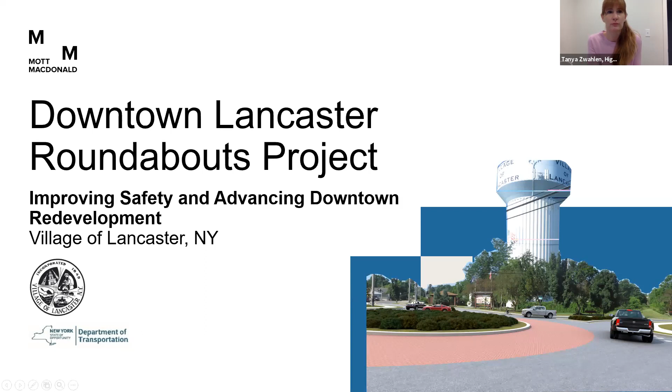I just want to go over a little bit of instructions on how this meeting will work. Jeff, can you advance the next slide? So probably a lot of you have not attended a public meeting using Zoom or Facebook Live, but probably some of you have used Zoom in the past few months as we've been in quarantine and social distancing. So for the purposes of this meeting, we're going to give a brief presentation. It'll be about 20 or 25 minutes, and then we're going to move to a Q&A period.

So while we're giving the presentation, I would ask everybody to mute your microphone so that we can reduce background noise during the presentation. For those of you in Zoom, you have an ability to raise your hand. And if you'd like to audibly speak during the Q&A period, you can raise your hand. And when we get to that portion of the meeting, I'll call on you. And then you can unmute your audio and ask your question.

For those of you on the phone, although let's see, yes, we do have some people on the phone. So for those of you on the phone, you're automatically muted. And if you want to unmute yourself, you can use *6. And if you want to raise your hand to speak, you can use *9. So *6 to mute and unmute, *9 to raise your hand.

For those of you who are using Zoom, you can use the Q&A feature at the bottom of your screen on the Zoom controls to submit questions in writing during the webinar, and we will be monitoring those and responding to those during the Q&A period. So that's if you don't want to speak, but you still want to submit a question. There's also a chat. You can send a question to us through that.

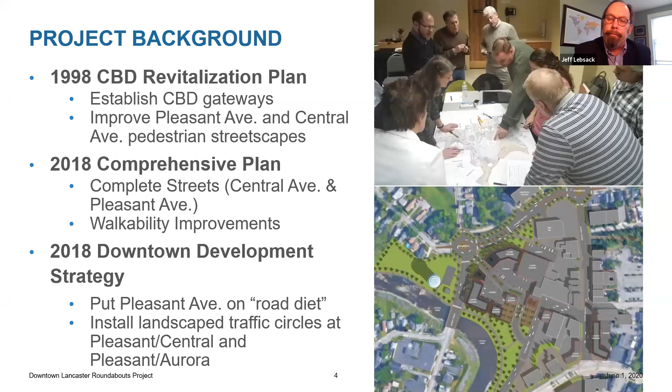And then in 2019, the village applied for and was approved for a CMAQ grant, which stands for Congestion Mitigation and Air Quality Improvement. And I just want to quickly touch on a few of the key requirements of that grant and how that affects the project. The grant is only for transportation projects that improve air quality and provide congestion relief. So that's one of the requirements of what the project has to achieve.

The amount that the village received from DOT is just a little bit over $3 million. That's 80% of what the project is expected to cost. For intersection improvements, the NYSDOT recommendations are that the primary objectives are to minimize conflict and provide acceptable capacity. So that basically means to do everything we can to make it a safer intersection and a more efficient intersection.

And then finally, roundabouts are what the state DOT prefers when they are either feasible or cost effective. And we can talk about that a little bit more as we go on. But that's the requirements of the grant that is funding this project.

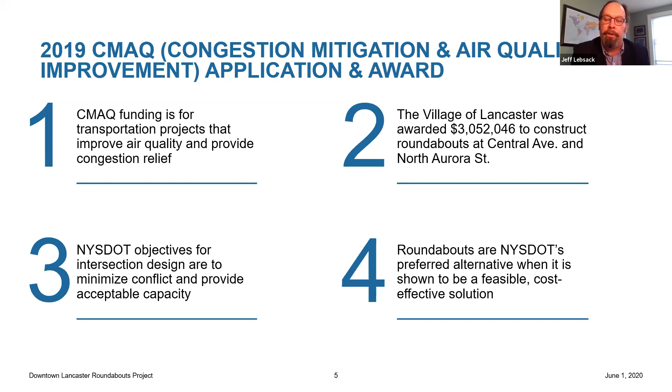So when the village looked at what they wanted to do on these streets and intersections, pretty basic objectives that anybody would want to do for their community, and that's to improve your air quality, to make it safer, to have more people out enjoying walking and bicycling and taking advantage of those travel modes that are healthy, and also to improve mobility for all users. So that means people who might have some restrictions to how they can move. So we want to make sure that there's access provided and that there's transit options.

And of course, what really helps is that if there's some private investment that goes along with the development, that additional tax revenue can really stimulate your economy. And finally, we want to promote sustainability. And so specifically things like reducing stormwater runoff into the surface water bodies, or reducing the amount of energy that's used as part of the project.

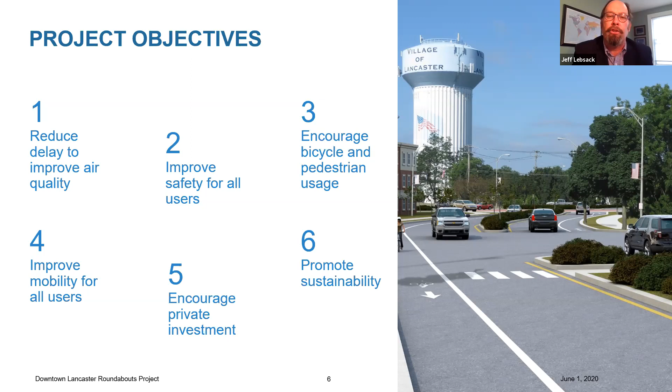So I mentioned the commitment to public engagement. And this is a quick listing of the things that have occurred since the project started at the end of 2019. Highland Planning conducted interviews with a few key stakeholders to learn about the village concerns and ideas about this project. That led to a public engagement plan that was approved by the village board. We met with the adjacent property owners in January. We went door to door to all the business owners on Central Avenue and West Main Street in late January.

We put information on the village website. We conducted a public meeting at the Lancaster Opera House at the beginning of February this year. We also were present at the Lancaster Family Fun Night, and hopefully found some more people who weren't able to attend that first public meeting. We did a mailing this last week to over 5,000 households in the village. We met again with the stakeholders in the corridor, and we're going to provide a survey to everybody for the next 30 days. So there's been a real attempt to inform people and to get their input on this project.

Now, as part of that, we've learned a lot of things. And as you might expect, there are very mixed opinions about roundabouts. And hopefully from this meeting tonight, I can address some of your questions and provide some information that will help you understand roundabouts better. There's also questions about, is this project needed? Is there a problem with the amount of traffic? How much is it going to cost the village, and how will that cost be paid?

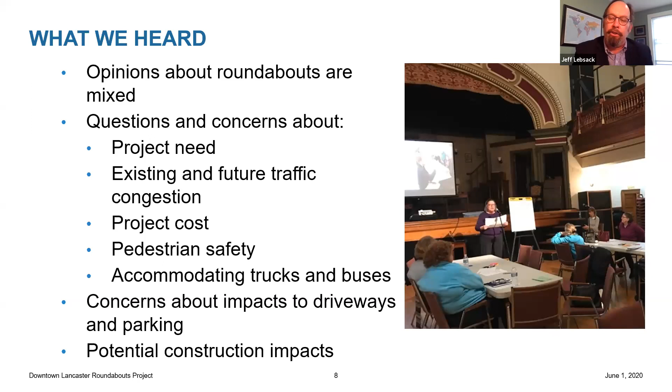So, as I mentioned earlier, the federal aid process requires a variety of steps that have to be gone through. So we started out with the public outreach to hear from the community about their ideas, concerns, issues. We also conducted a pretty extensive range of environmental studies that have to be done as part of the federal aid process, and those include things like examining the effect of the project on surface waters, effect on endangered species, effect on cultural and historic resources, and if there's any environmental contamination in the site.

So all those things were done in early 2020, and the good news is there really aren't any major environmental obstacles. There are a few things that we have to be aware of, and we can talk about those later. We then developed some alternatives to consider for the project, and we analyzed those alternatives. After we analyzed the alternatives, we prepared preliminary plans for the feasible alternative. We developed the cost estimates for that alternative, and there's a draft design report which will be on the website next week for people to look through.

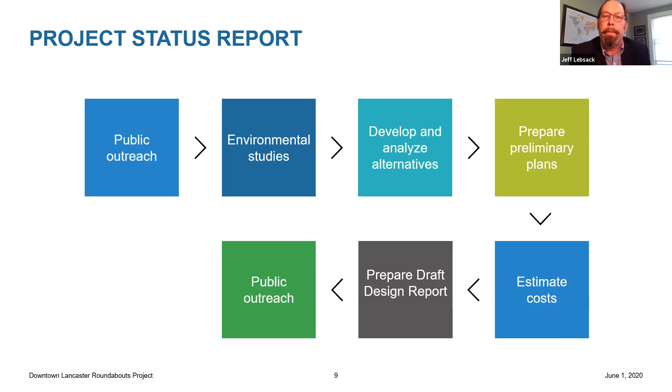And then here we are tonight with some more public outreach, and the public outreach we get tonight will also be fed back into the design report and the preliminary plans. And so there's sort of an iterative process here that we go through to do as much as we can to address the community's ideas. So I talked about the analysis of the alternatives. One of the questions that people have asked is about the traffic on the streets and at the intersections.

This is just some basic data that shows that north of Pleasant, about 15,000 cars a day on Central Avenue, which is about close to the limit for a street that has 2 travel lanes. And about 4% of that traffic is trucks. Pleasant Avenue between Central and North Aurora is about 7,000 vehicles a day. And North Aurora Street south of Pleasant is a little over 8,000. And as you all know, there's quite a trend of the traffic using North Aurora Street to Pleasant to Central and vice versa. So there's a lot of traffic that flows in that movement.

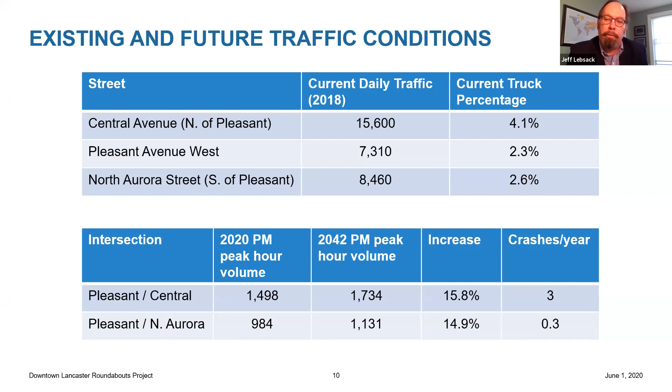At the intersections themselves, Pleasant and Central during the afternoon peak hour has about 1,500 vehicles using the intersection. That'll go up to a little over 1,700 in the future. So just a little bit less than 1% a year over the next 22 years. And there were 3 crashes per year; it's actually 9 crashes over 3 years because we have to analyze the most recent 3-year period. Pleasant and North Aurora obviously doesn't have as much traffic, so the increase will be slightly less, and the crashes there have actually been very low, so that's good news for everybody.

We had 4 alternatives that we analyzed with this traffic data, and those alternatives are the no build, which as you can understand is to do nothing. We also looked at just improving the signal timing at the intersections, which was a suggestion from the February 6th meeting. We also looked at improving the signal timing, but also trying to do the road diet and making the roads a little bit smaller and the intersections a little bit smaller to make them safer for pedestrians and slow vehicles down. And then we did the roundabouts at the two intersections.

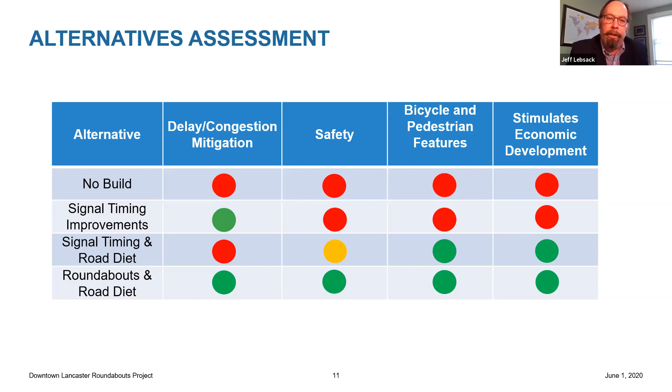And we evaluated the results of that analysis against their benefits for delay and congestion, safety, bicycle and pedestrian features, and their ability to stimulate economic development. These were those objectives we talked about earlier. So the signal timing definitely improves delay and congestion, but really doesn't do much else in terms of safety or bicycle or economic development. The road diet is almost the exact opposite, because it would improve bicycle and pedestrian and economic development, a little bit of safety by narrower roadways, but it did not improve the intersection delay or congestion. And the roundabouts did improve all four of the objectives.

So with that, we developed the concept that you're seeing on your computer screen now. This is the two roundabouts, and I also want to point out that the roundabout at West Main Street is shown on here. That is a separate project. It will be under construction shortly. We have been in complete coordination with that design team to make sure that these two roundabouts work together well. So all of the analysis that was done in that previous discussion did account for the West Main Street extension and the mini roundabout on North Aurora.

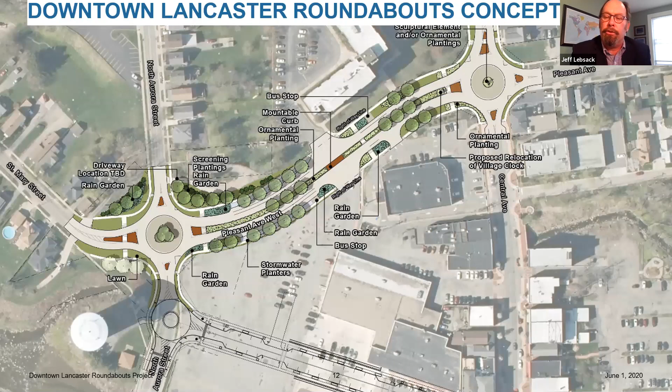So I want to just zoom in on a couple of the areas of this concept plan right now and go through some of the things that we can talk about during the questions and answers. So at the roundabout at Central Avenue, the current location shown in this drawing does have some impacts on property owners and the local businesses. So we have talked to them. We are looking at ways to reduce that impact, to address their concerns about parking and how their customers can get to their properties.

There is a clock in the median on Pleasant Avenue. Where it goes is up in the air. So if there's somebody who's got a great idea for that clock, we'd love to hear it. If you have an idea for what would go in the center of the roundabout, that's also something that's important.

And I also want to point out that this design is coordinated with the Central Avenue bicycle lanes project that will be implemented this season. And that is to put 5-foot bicycle lanes on each side of Central Avenue all the way to Walden, and it would eliminate parking on the east side of Central Avenue.

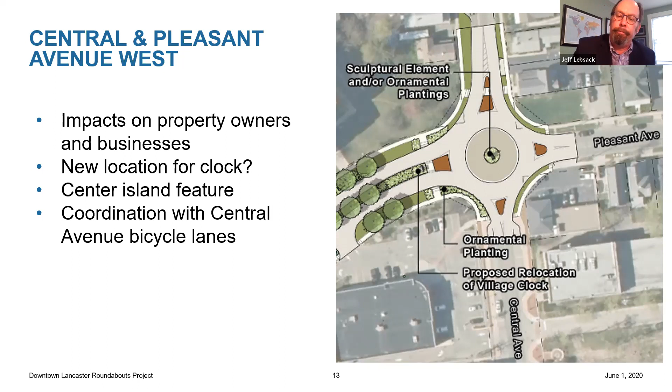At the North Aurora roundabout, we are impacting one driveway, and we're meeting with that property owner this week to talk about ideas on how to adjust their driveway. I did mention that we've coordinated with the West Main Street mini roundabout, and we have a nice dividing line between the two projects, so there won't be any tearing up newly constructed roadway. So they'll build their portion, and then this portion, assuming it's built this way, would mesh right in with that.

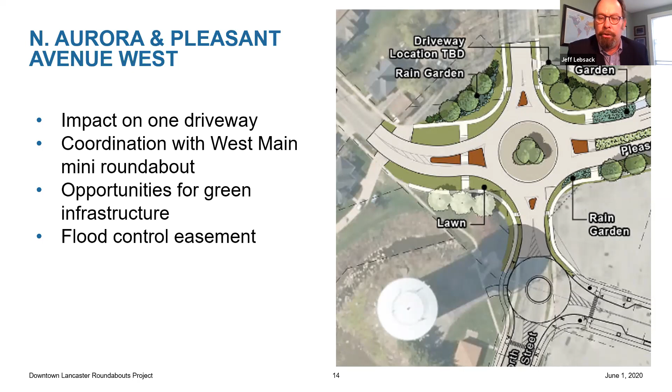This particular location also gives us a lot of opportunities for what we call green infrastructure, which is a method for doing a natural stormwater treatment. And there is a flood control easement here as part of the Cayuga Creek flood improvements that were done many years ago. And it's not a major obstacle, but we do have to go through a permit process with the Department of Environmental Conservation and the Corps of Engineers. So that's one of those environmental things that I mentioned that we do have to take care of.

Between the two roundabouts, this is the road diet on Pleasant Avenue West. The concept shown has 11-foot travel lanes, 1 in each direction, 6-foot bike lanes, some parking. Two things I want to point out are the mid-block crosswalk that would accommodate pedestrians from Lancaster Towers and give them a safe crossing of the roadway to get to the stores on the other side of the street. They would cross one lane of traffic. There'd be a pedestrian refuge. We could also add some special signs there if that is needed, but this is specifically oriented towards the population there at the towers.

We're also intending to restrict left turns in and out of those two driveways. So either one of them would be right in, right out, but if you do want to go the other direction, you make your right turn, you go down to the roundabout, you go around it, and you come back the other way. So it's really not a major inconvenience, and it would make the intersection much safer. And we also note that we're going to improve the bus stops on either side of the street there for the people who use the bus.

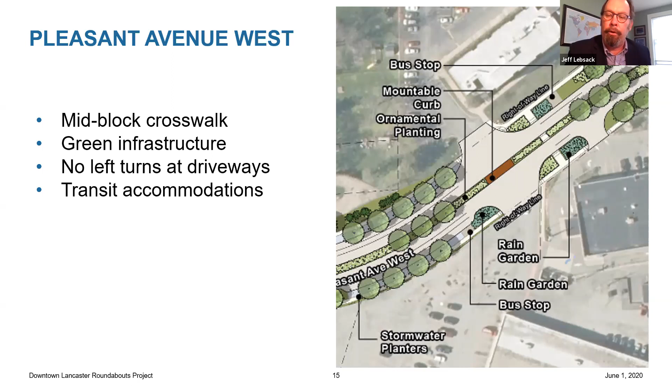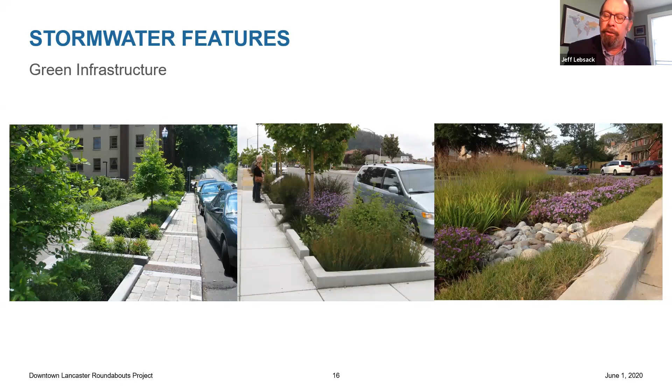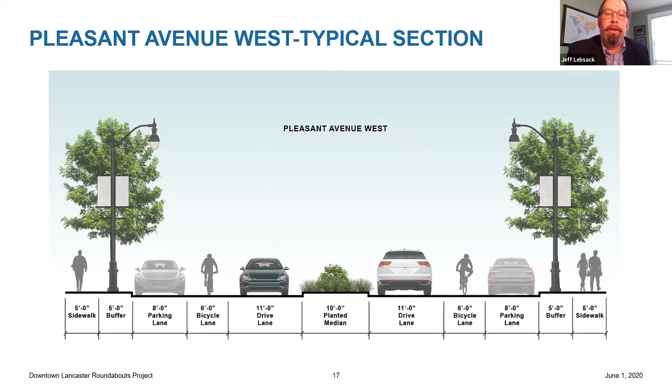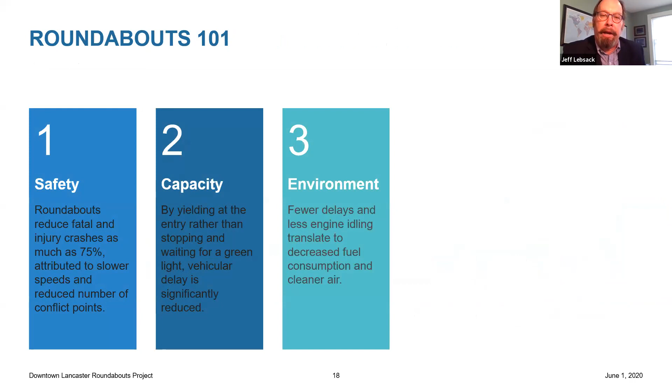So at this point, I would just quickly like to talk about some of the details and information about roundabouts. And on this slide, we're looking at the 5 major benefits that roundabouts provide for intersections. And number 1, and most importantly, is safety. As you can see on this slide, they reduce fatal and injury crashes by as much as 75%.

And if you remember our first public meeting in February, Tom Sweeney told the story about his brother at a signalized intersection in Texas. And I think those are the things that we all fear about signalized intersections. And if you can eliminate those type of serious injury or fatal crashes, that's a major benefit right there to public health and public costs.

They also increase capacity, and I want to clarify that capacity does not mean speed. Roundabouts force people to slow down as they come up to the intersection, but you have to yield if there's a vehicle in the intersection. If the roundabout's properly designed, you'll have to slow down just to maneuver it. And the main thing is, though, you're still generally moving.

So you actually get through the intersection faster, but you're going slower because you're still moving as compared to sitting at a red light. And I think we all understand that on a busy intersection, it's one thing to sit at a signal, but at 10 o'clock at night when there's no traffic, to sit at a signal for 30 seconds is kind of an annoyance.

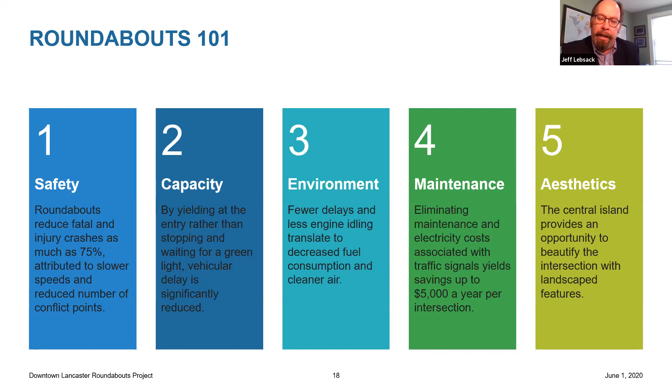And finally is the aesthetics. As we talked about the objectives of the previous plans and having some kind of gateway treatments to indicate that you've arrived at someplace special, these roundabouts can really achieve that objective for a community redevelopment project.

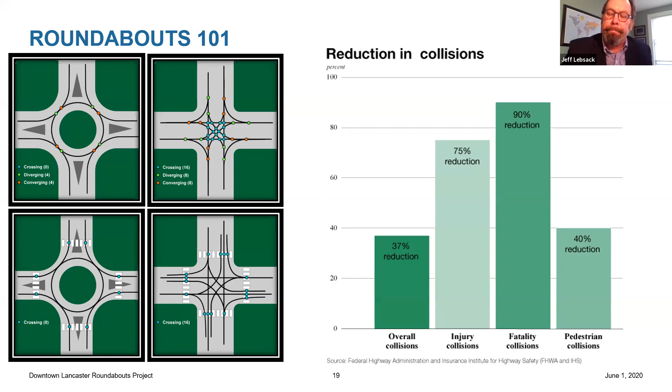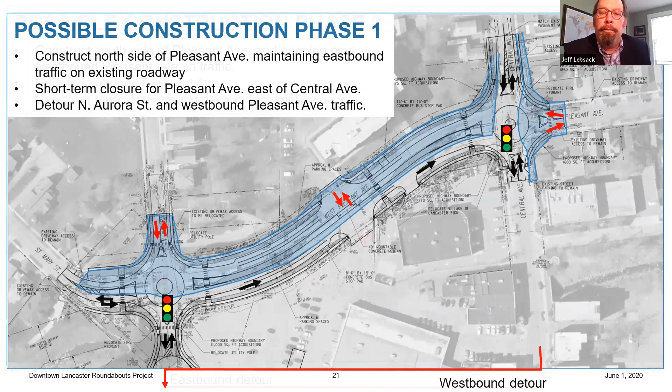Pleasant Avenue constructed while we signalized at the two locations and would have the westbound West Pleasant detoured either on West Main or Broadway. There would be some short-term closures or detours to accommodate those areas with the red arrows, but those would be very short-term. And then following the completion of this, which gets more than half of the work done, the second phase would do the south side of Pleasant, and the detour would be for eastbound traffic. Again, there still would be traffic signals in place to control the intersections until they are eventually opened up to traffic.

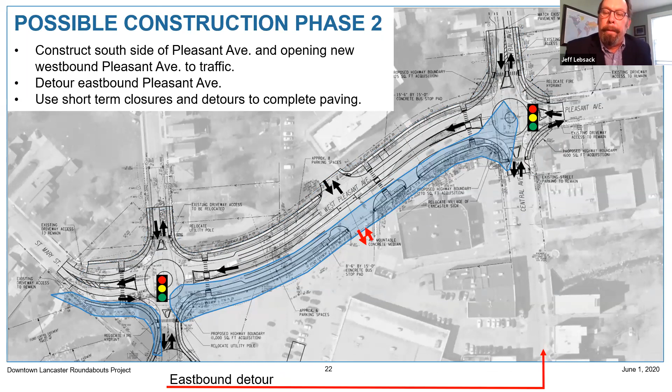So we're just about done. Right now, we've met with the property owners last week. We're conducting our meeting tonight. We're going to get lots of ideas and learn things from you tonight and the next month. We'll incorporate those into our designs and our design report. We'll start the right-of-way appraisals process. And then if all goes well in the fall of this year, we'll have design approval, which will allow us to initiate right-of-way acquisition. We'll also be applying for those permits I mentioned for the flood control easement.

We'll start detailed design. And then once the design is done and the right-of-way is complete, which we would anticipate to be the middle of 2021, we would have another public meeting to go through the detailed plans about the construction impacts. And we'd have more information describing how the project would actually be constructed. And then the intent is that by September of 2021, the project will be put out to bid and construction would be completed sometime in 2022.

So with that, I'm going to say that there's going to be a survey available on the village website. I think it's available now. And that will be open for 30 days. So until June 30th, you can take the survey and we'd love to get your comments on that. And now I'm going to turn it over to Tanya and we'll be happy to answer your questions and listen to your ideas and comments.

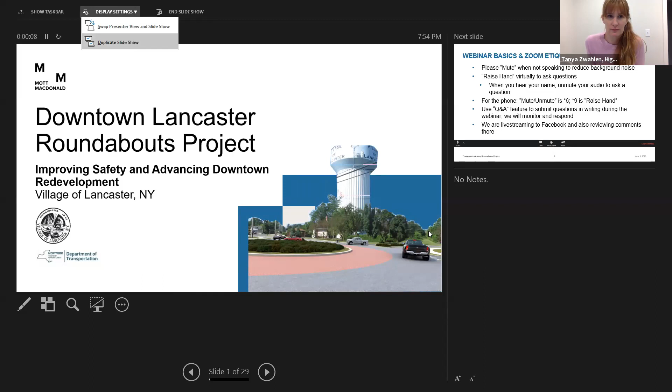Great. So here's the survey link. Let me get it. Sure. Okay. And I'll say while you're getting there, the recording of this meeting will be posted to the village's website. It will also remain in the Facebook feed because we broadcast this event through the village. We will be developing a meeting summary, which will include responses to all of the questions that we received. And we'd like everybody to take this survey before June 30th.

Let's see, there's only 35 people still on the Zoom. I don't know how many people are on Facebook, but thank you to everybody for participating tonight. I know this is not an ideal method to have a meeting about a project, but I'm grateful to everybody for taking the time. And if you were on tonight and there's people who you know would have liked to know about this meeting and couldn't participate, please ask them to watch the recording and then submit a survey. So that will remain online. So hopefully we can reach even more than the 100 and something people who attended tonight.

Anything else, Jeff? No, I second your appreciation of everybody who participated. We are in very difficult times, and a major infrastructure project in a village is a very challenging decision to make. And I really appreciate the questions and comments that came in. But we will go through the process, and in the next couple of months, we'll have a design report that will be a key decision point in the project.